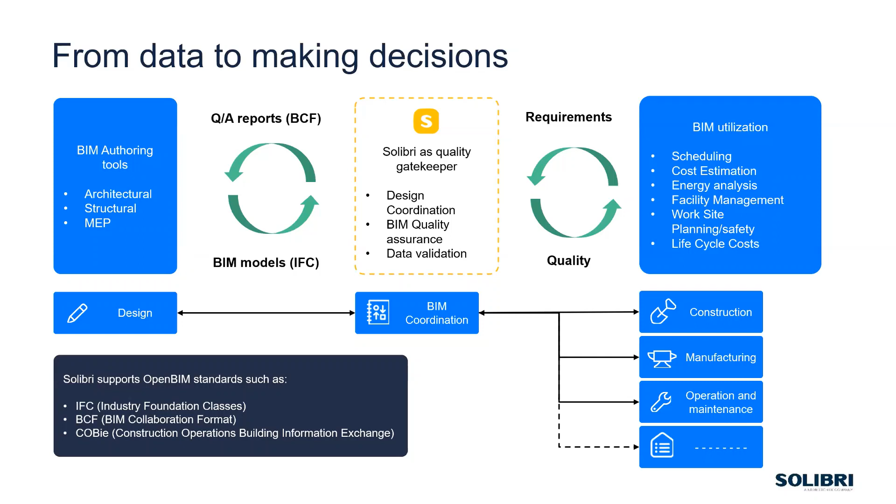Okay, so the Solibri workflow starts with getting the IFC file. We can add multiple IFC files, federate them, and visualize them. That's the basic already, and it brings a lot of benefits compared to, for example, 2D, in that we can have all the models in one place.

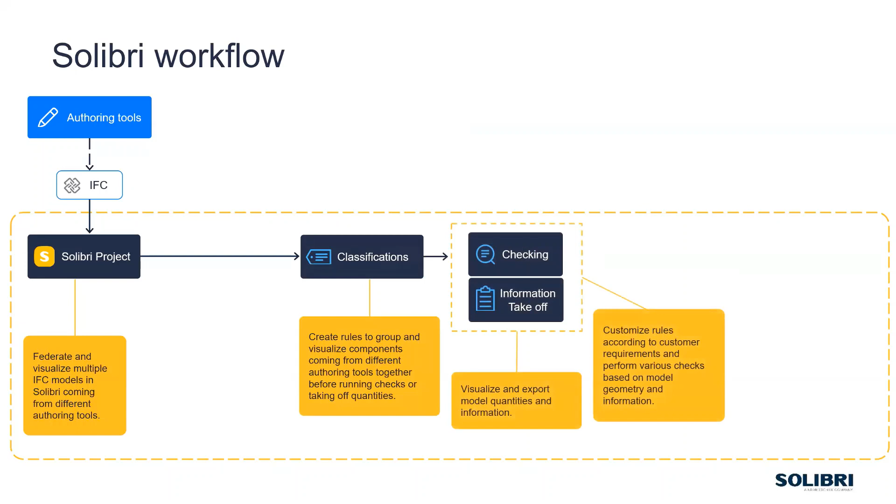After this, we can use the Solibri classifications. This is maybe a bit misleading since there's already classifications coming from the authoring tool, but Solibri has its own classification function that allows us to group and visualize components in Solibri. This becomes really effective when we can organize the model components first, and then feed those to the checking or the information takeoff.

These are actually the main resources, so to say, in Solibri. We have classifications, we have the checking rule set files, and then we have the information takeoff definition files.

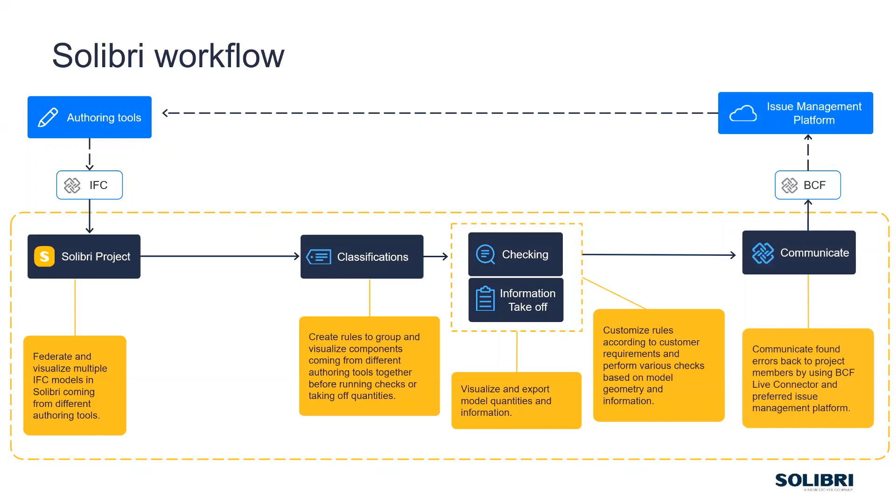After this, we can use BCF to communicate the found issues, or usually issues found, but of course you can use it for anything else. You can report anything BIM related from Solibri using BCF, either through an issue management platform that supports the BCF API, or as a BCF file.

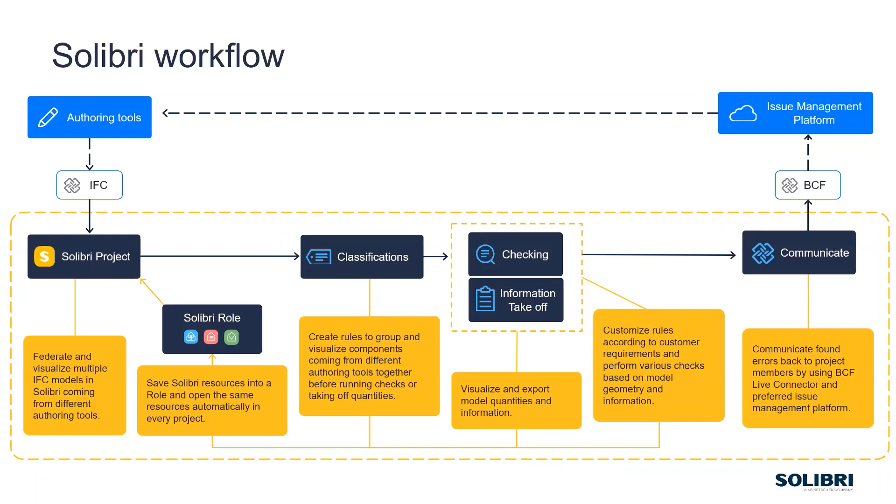The resources - classification, checking, information takeoff - can be saved either company specifically or role specifically, and then you can use them again in the next project that you will get.

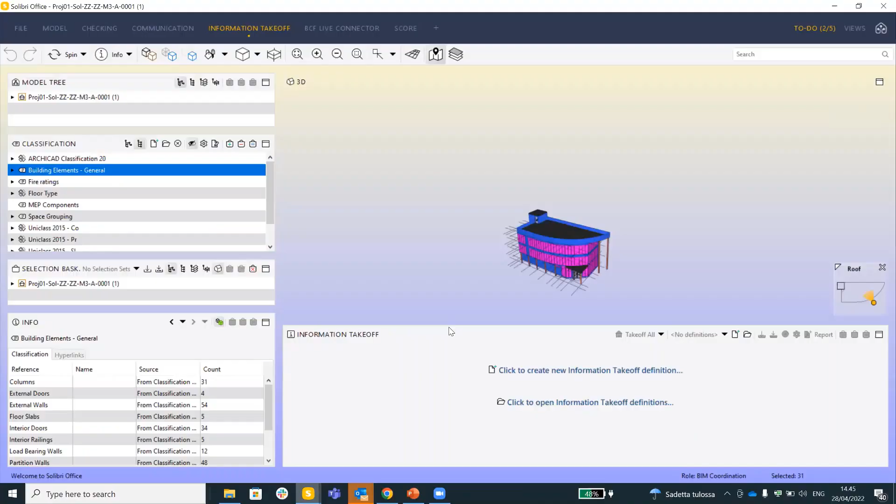Okay, let's jump then to a live demo. I'll try to focus the demo more on the checking part. I'll walk you through it just quickly.

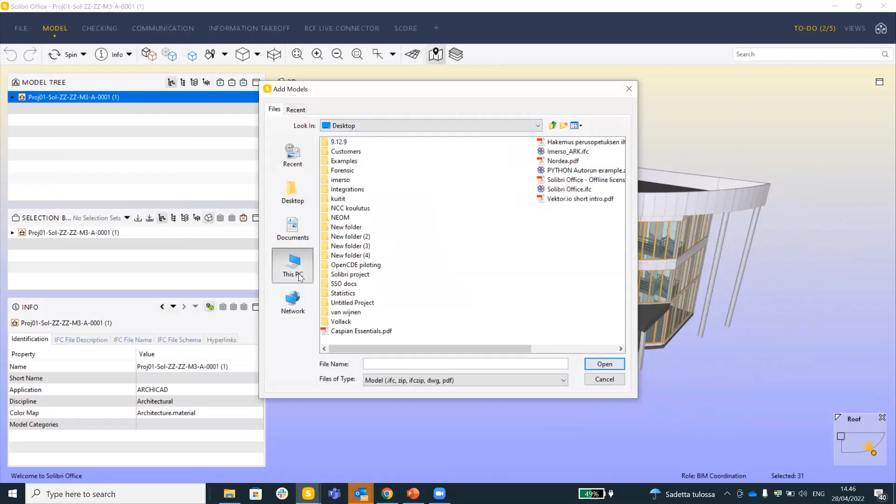So now here we have one architect model open. We can combine models. Let's get some - I need to. From here I can get, for example, the ventilation model, just to show you that now we have two models. This is from Revit, this is from ArchiCAD, and they're obviously both in IFC format. And here we have all the possible 3D tools.

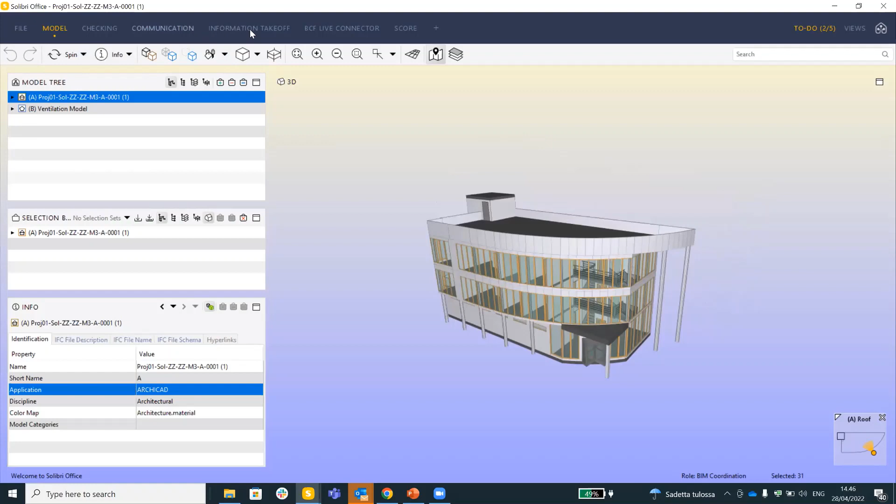Just to show you some example of the classification. We can, for example, here we have color coded - we can easily just visualize based on the fire rating that the walls have. And this information, once we have done the classification, we can also use that elsewhere in Solibri in the filtering, which is quite handy.

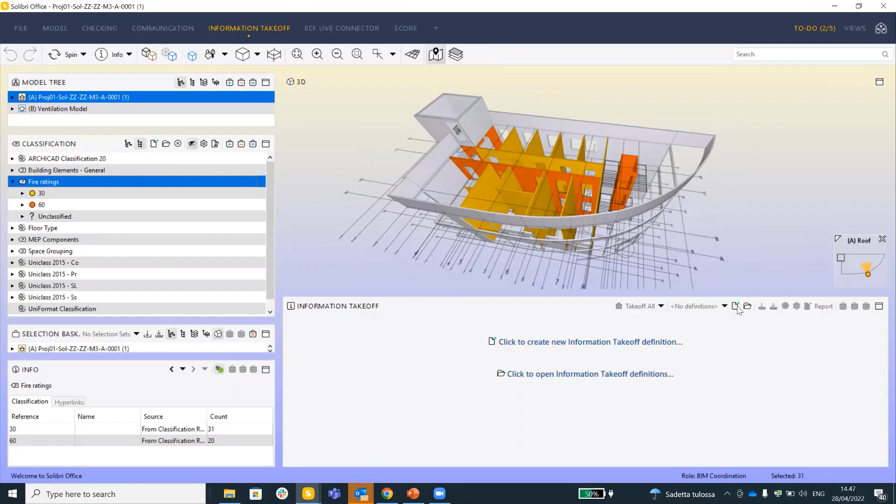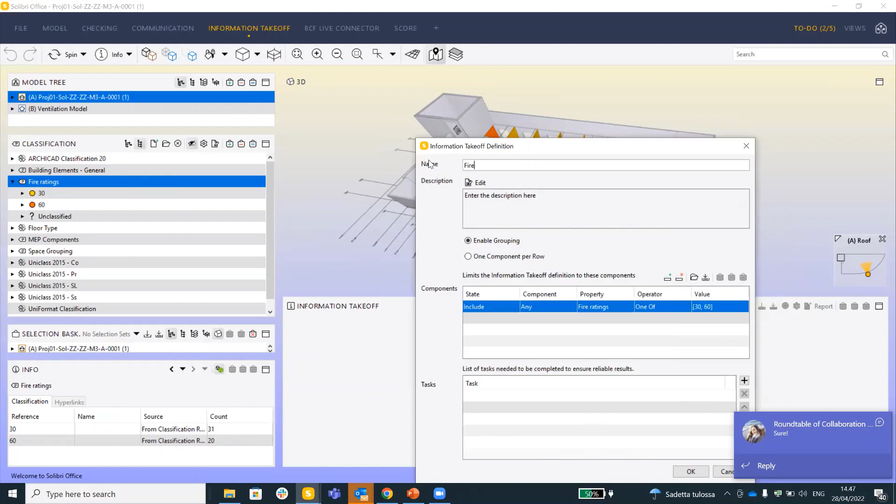So once the classification is done, we can, for example, I want to take all the quantities from the fire rated walls. So here I can define that I will use the classification, fire rating, and then I will just click and choose both of these, fire rated.

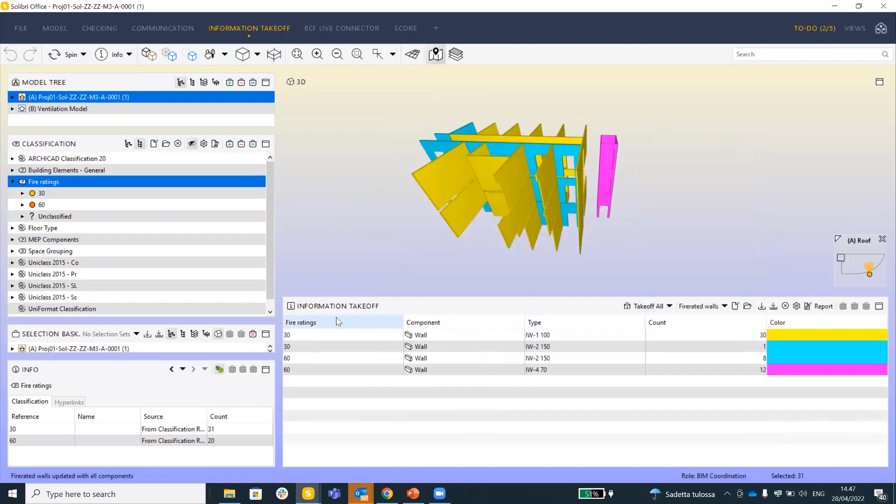So now here we have the walls. We are missing the fire rating, and we can add here a new column, which we will again choose from the classification. And now we can see the type, and we also see the fire rating. We can also adjust the color so that the information takeoff gives the same color as the classification, by changing the color column here.

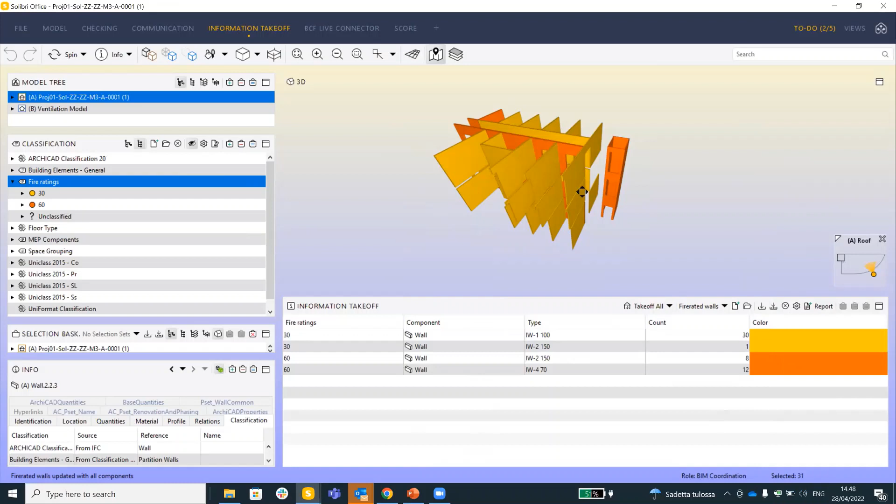And this can be then, of course, reported. Okay, so let's go to the checking now, since we have about 10 minutes left.

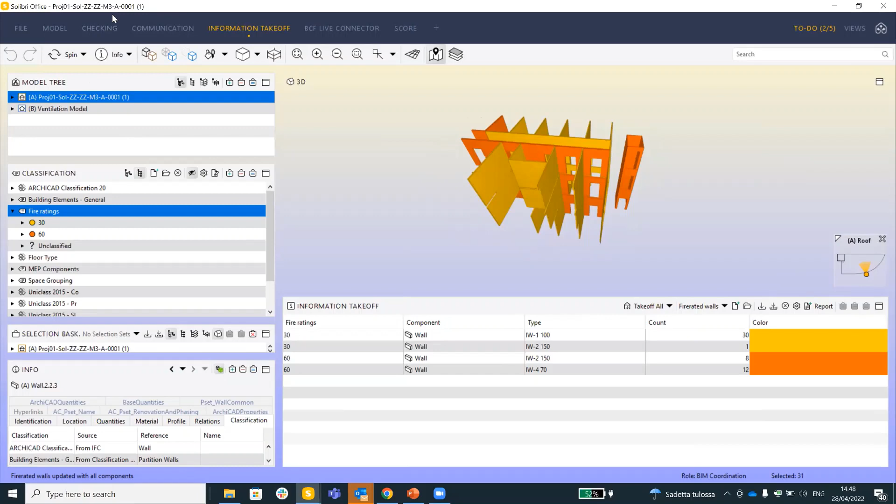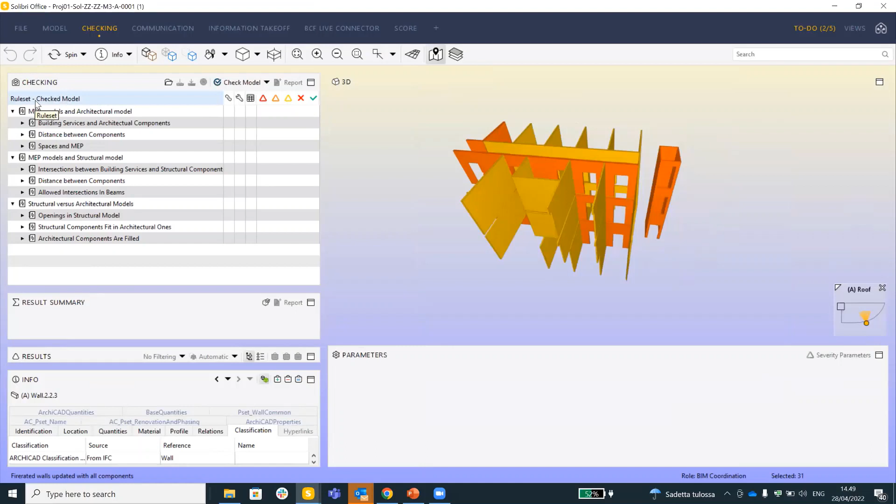Okay, yeah, so well, checking happens here under the checking layout. Maybe it's also good to mention that these are the predefined layouts that we see here that come out of the box with Solibri, but we can change the layouts, and each of the layouts is built from these different windows or views that we see here. But by default, the checking functions are here under the checking layout.

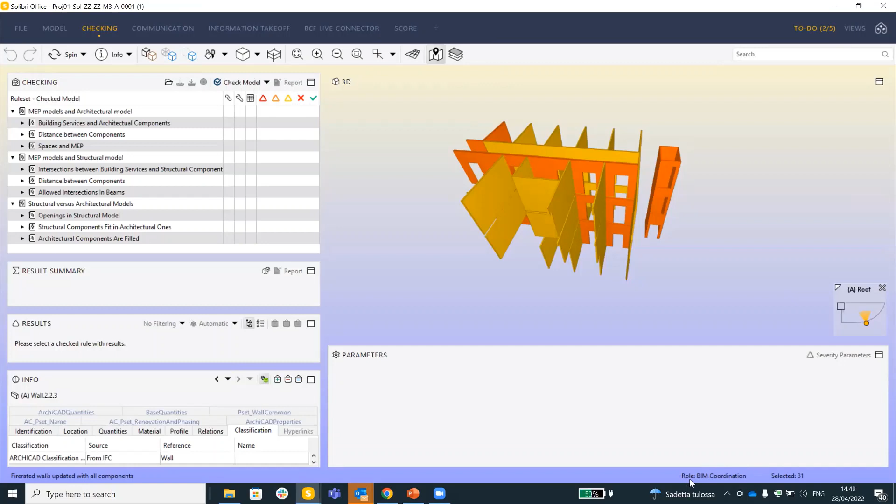So the way Solibri works, you can see here that I have this role BIM coordination open. These are also out of the box roles, but we can create our own company specific roles, and the rules can be parameterized, and you can create your own internal quality assurance process from this. But now we will just look at the out of the box rules.

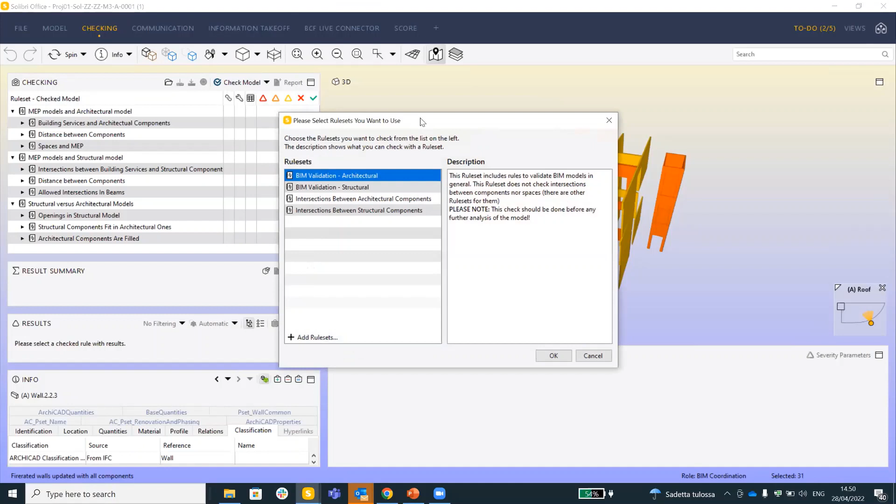So with the BIM coordination, I'm getting quite a big variety of different rules, as we expect the BIM coordinator to be really having a federated model with all the disciplines included. And here we can bring in more rule sets.

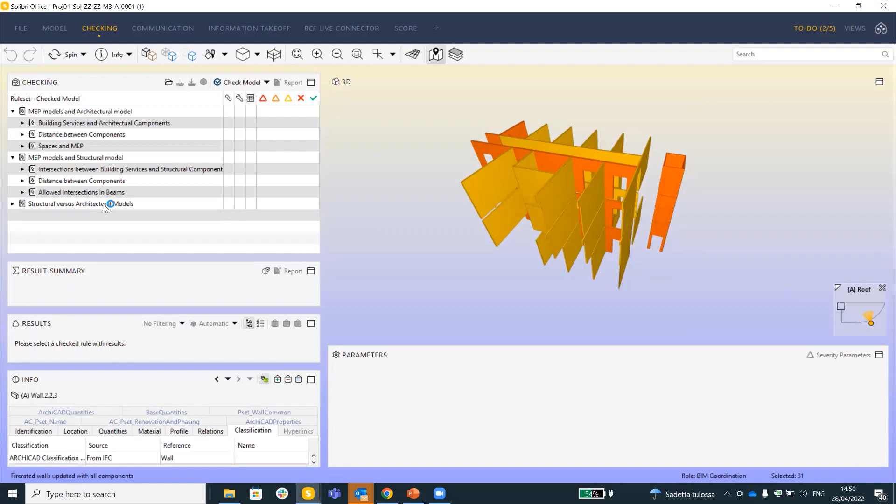Maybe we'll just go through it shortly due to the time frame here. We'll quickly go through some of the rules. So now I don't have the structural model here, so we can maybe disable these rule sets. We don't need to run them now, but we will check the MEP - actually this one as well - let's check the MEP model against the architectural model.

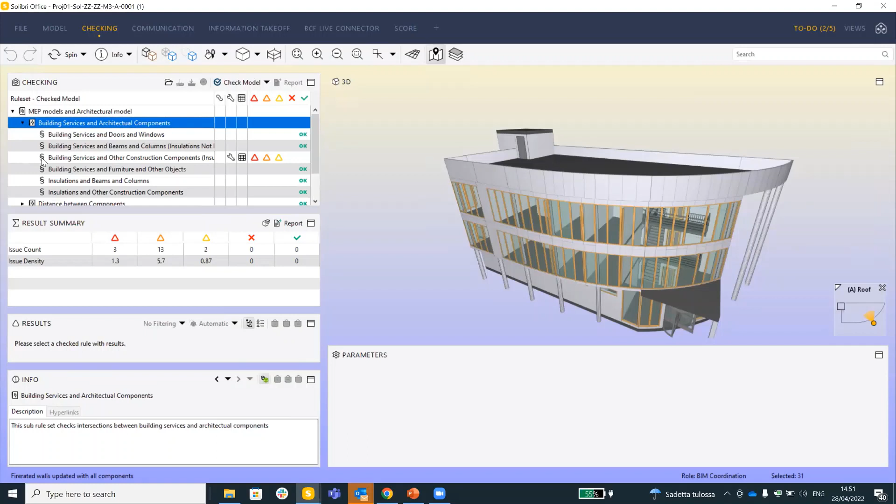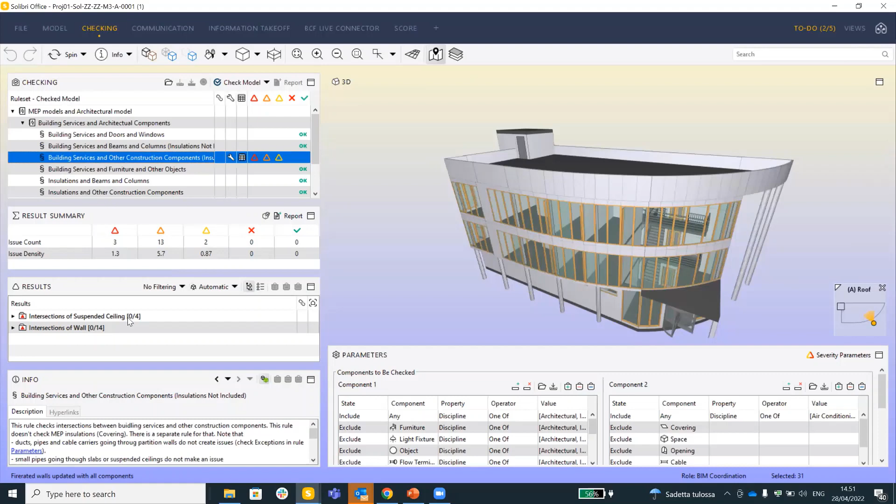So now we can see that the rules have found issues. If we close down the whole rule set, we can see that okay, this rule set has issues. We open it up, we can see that these rule sets, no issues found, they are okay. We keep opening until we get to the actual rule, which has this kind of symbol, and then we can see that this rule now has some issues. Once we choose this rule set, you can see that the result summary and also the results change.

And now they are showing what kind of issues we have in the model. So this is just the intersection rule, and now we can see from here, okay, there's a suspended ceiling clashing with this duct here.

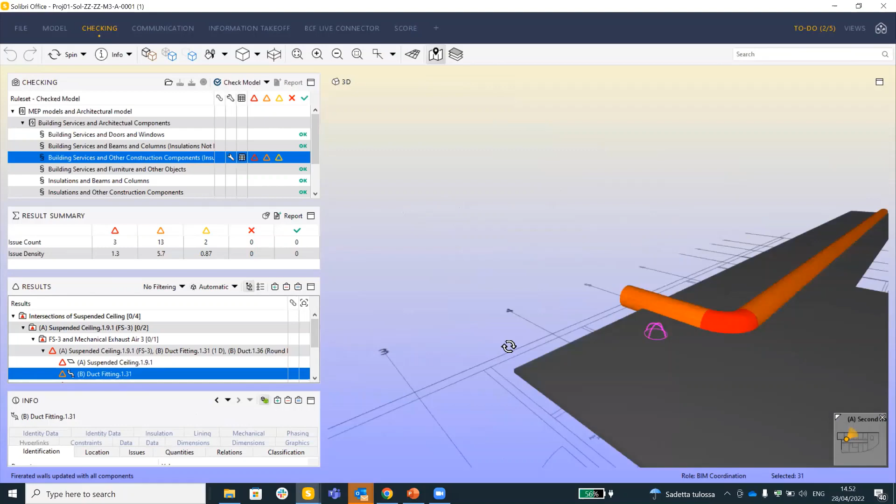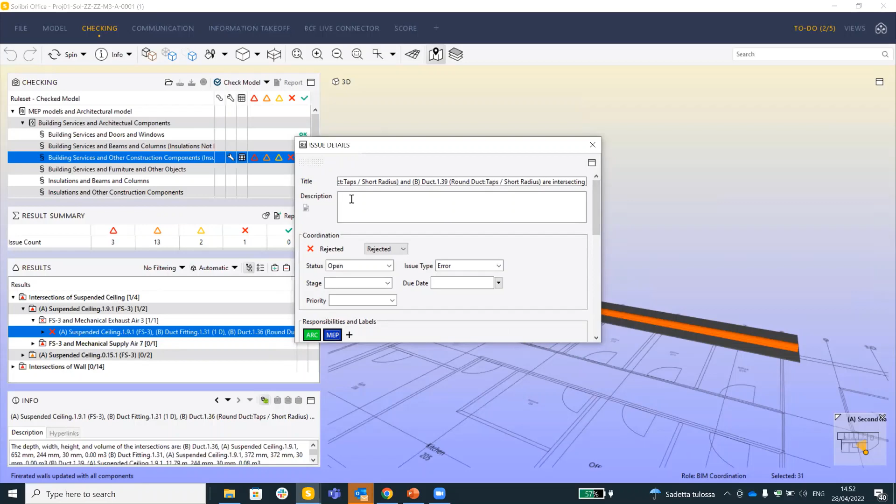And now the workflow would be from here that we create an issue. From this, we add a slide. We can say that this is for the architect and MEP, the responsibility. We can create, add the description here, what is happening, and we can also give the comments here.

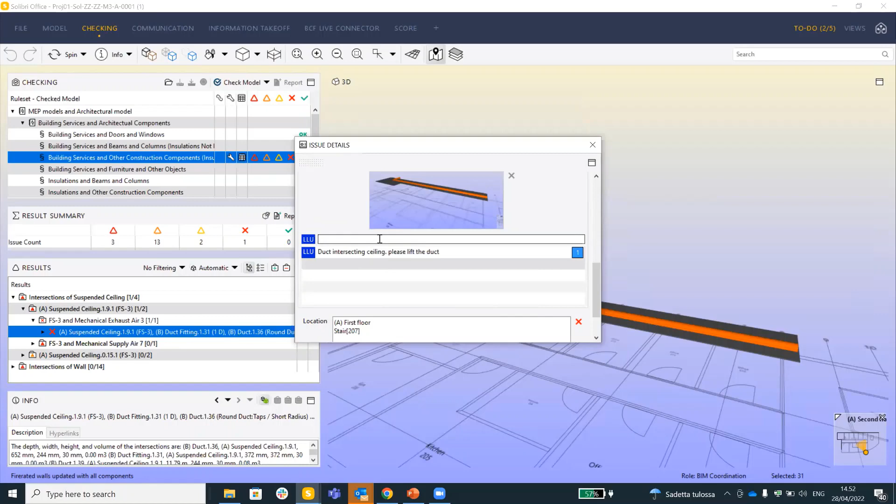Like this. And now, once we have done this, we can see that this issue has a slide and it has a decision made here.

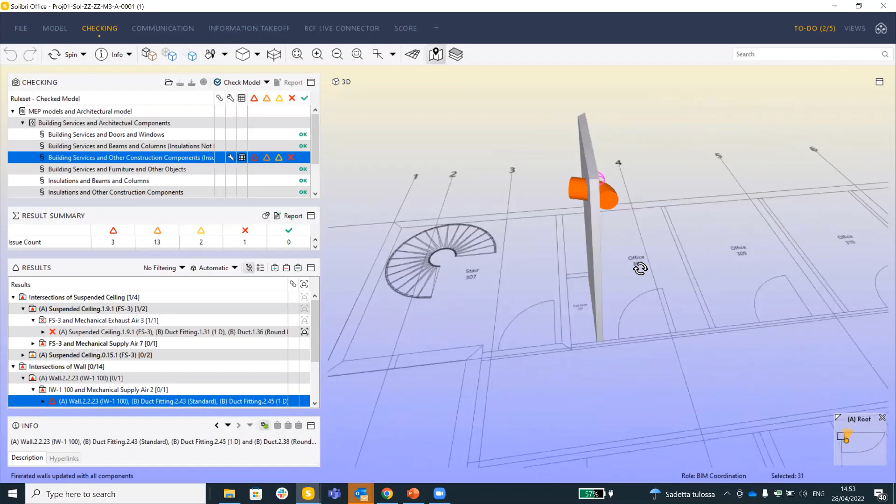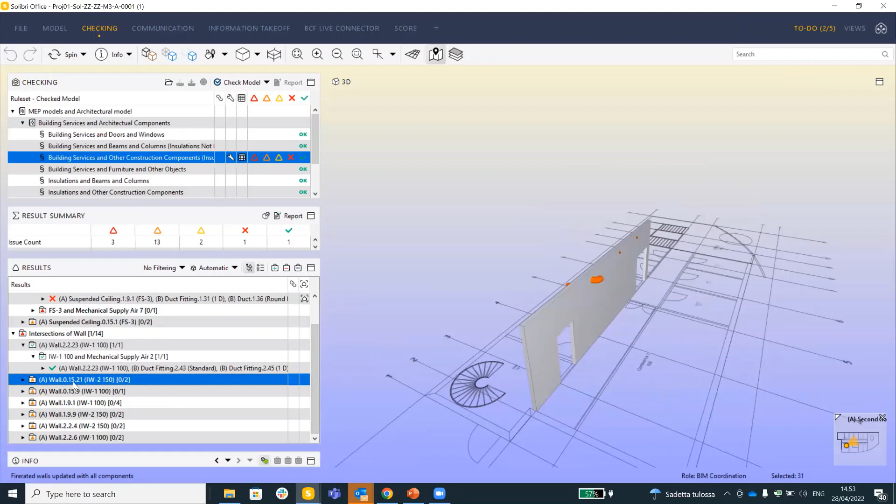This would be the same way we would go through all the issues. Of course, there might be some issues that we know we don't need to report, this is okay, and then we can also have the option to accept the issues here. If we want to create the slide, we can also choose to add them from the group level, so we don't need to create from each and every one of them. So for this whole wall, even though it has multiple clashes, we can add the slide from this level.

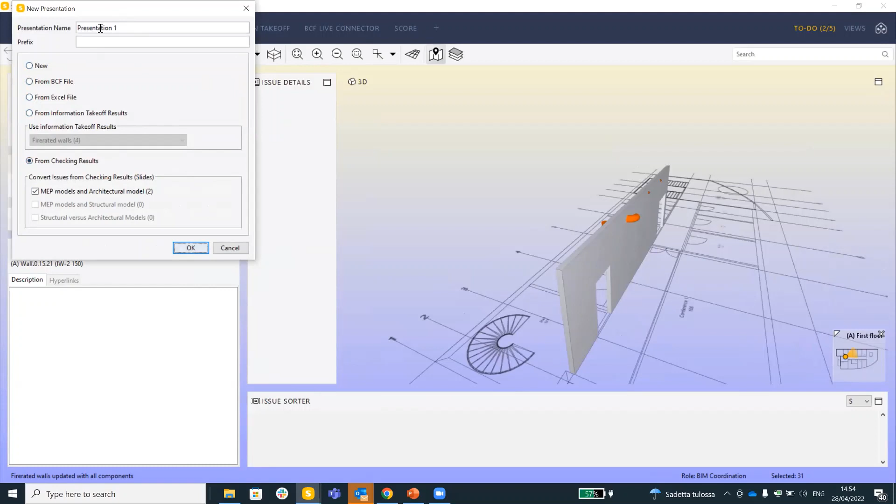After we have gone through all the found issues, we will go to the communication, and here we can add a presentation from the checking results and give it a name. I'll just leave it as presentation 1. And now we have all the issues here, and we can fill in the metadata of the issues if we want to.

You can see there is a triangle here on the slide, which means this has a linkage to the checking rules. That allows us, when we update the IFC file, to see which of the issues have been resolved and which issues are no longer in the model. So we would recheck the model, update it, recheck it, and then update the presentation from results, and then we can remove the issues that are no longer there.

That would be the basic workflow in Solibri.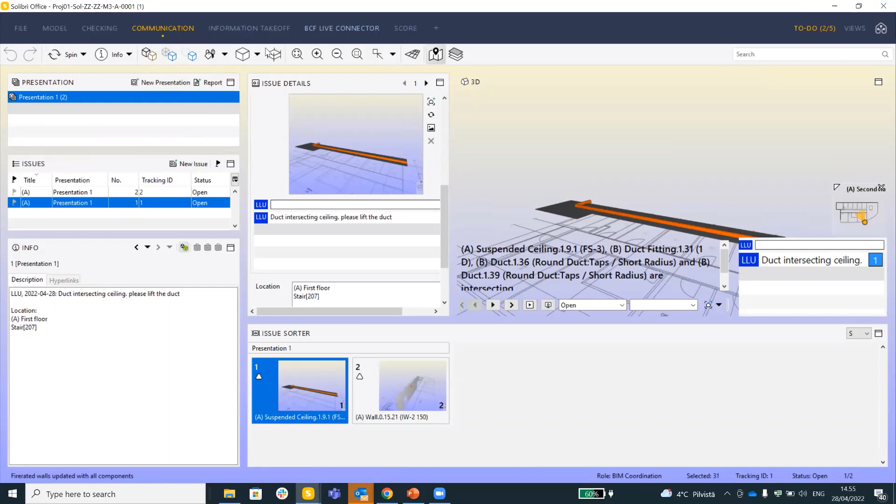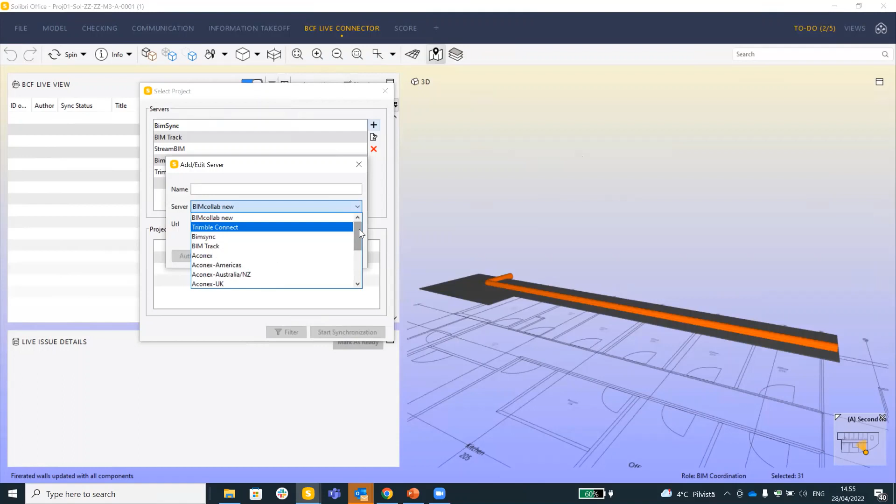And now if we want to use an issue management platform, we can use the BCF Live Connector. We would just bring in the issues here, and it would automatically synchronize them to the preferred issue management platform. Currently, you can see the list of what is supported at the moment on the issue management platform side.

This was really a short demonstration of the basics of Solibri. There's so much more, but in this time frame, I think we need to leave it on this level.

If you have questions, please shoot, and I can try to show in Solibri.

Fantastic, thank you very much.

There is a question here about whether you can tell us about the possible plans for using the IDS standard in Solibri, knowing that you're involved in the IDS project.

Not yet implemented, but yeah, it is there to be implemented at some point. We are aware of it, and we are contributing to the standard and following it.

Okay, there is another question for Solibri: why not just create the communication through BCF Live Connector? It can be shared with other BCF platforms as well that can read BCF.

I don't know, was this referring to the fact that Lauri, you created the issue first to the presentation? But of course you can create an issue directly to the BCF Live Connector as well. Yeah, I can maybe show. So yeah, that's a good question. So but then I will just connect to one of these.

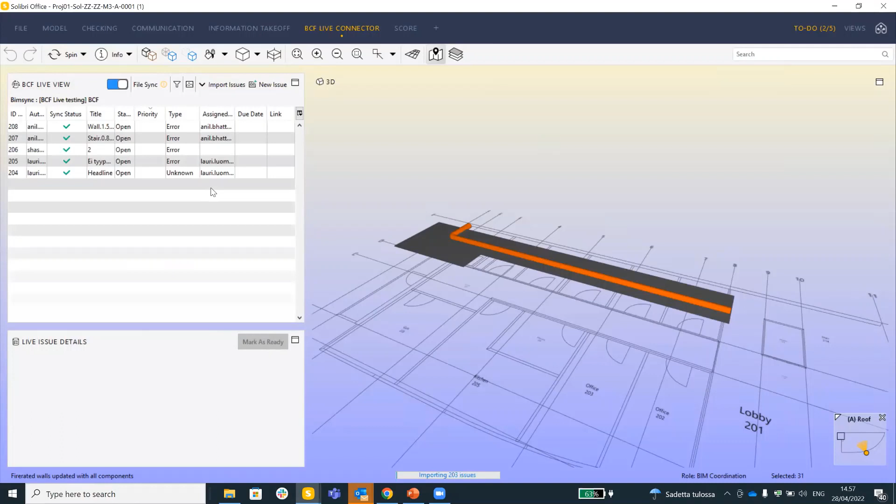Might take a while. Okay, so this is now connecting with BIMsync. We can see here that it's bringing in a window to what we have on the server side. So it's bringing in 203 issues here, and we can see that when the sync status is green, that's the actual situation on the server side. So yeah, now I brought it to the communication.

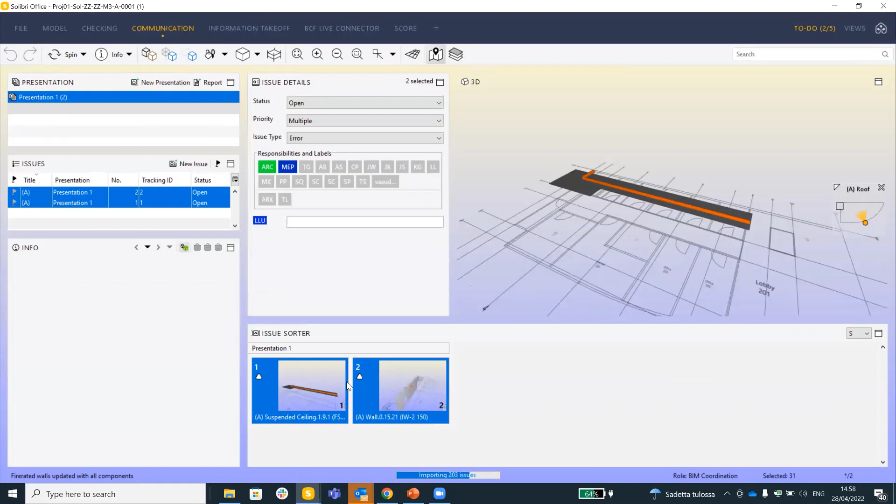I can also just come to the BCF Live Connector and bring from the checking results directly here. It's also possible that I first create it like I did, have it here, then choose these issues, and bring from the presentation and the selected issues. That's an alternative workflow here.

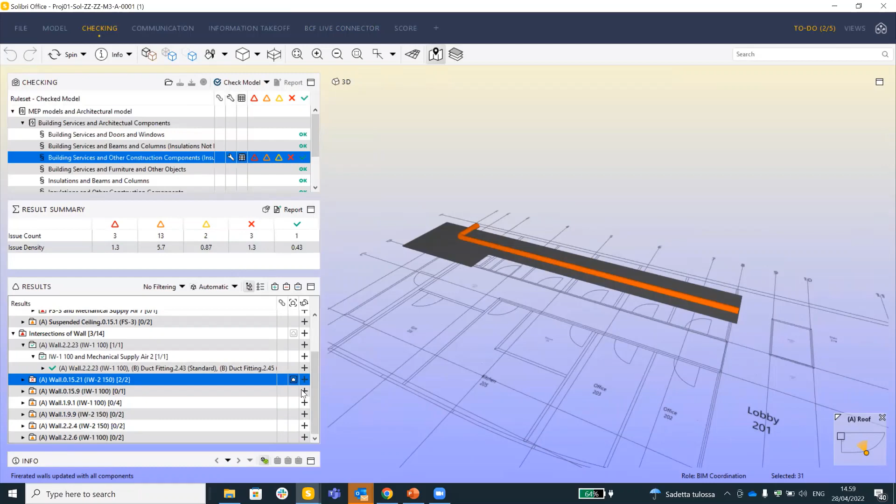And can't you also create directly from checking to the BCF Live Connector? Yes, that's true as well, there's many ways. So I can also click now that I have the synchronization on.

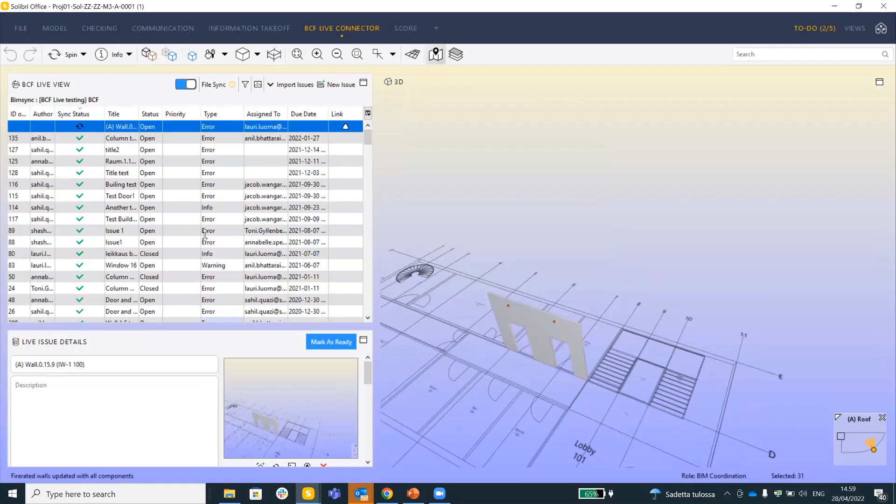This column will appear in the results, and this allows me to just double click here, and it automatically goes to the BCF Live Connector. Now if I go here, we can actually see that if we sort by the sync status, we can see it's here. The sync status is not yet synchronized, because I haven't pressed this mark as ready button yet.

So I could do the changes here, maybe change the viewpoint, and then mark as ready, and shortly after that it will give the sync status, and now it's synchronized. It's in BIMsync, available for everyone who has access to the project.